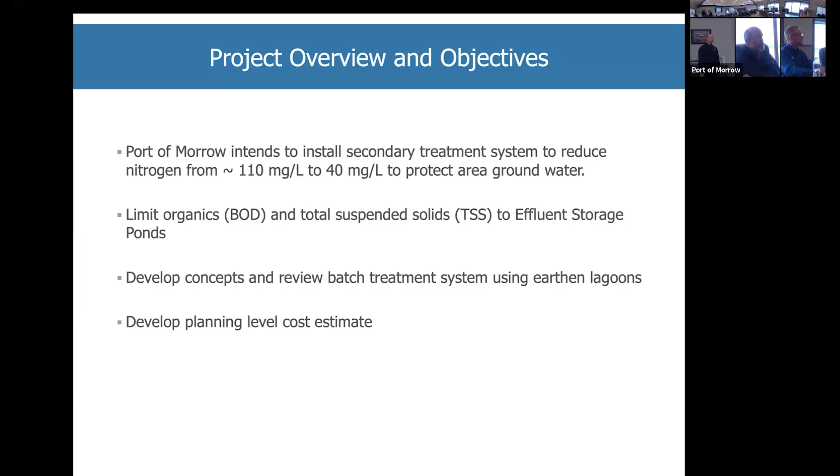In addition, we're utilizing earthen lagoons rather than big concrete structures. We're planning on essentially digging holes in the ground, lining those holes with HDPE liner. That will tremendously save on costs compared to concrete basins, which we'll get into further. And then finally, we're going to close out with a planning-level cost estimate that we have today.

So milligrams per liter, is that synonymous with parts per million? Yes, correct. So what would that equate to roughly, like in pounds of nitrogen per inch of water? That's a good question. Can we make that calculation quickly? Yeah, I can, it is... off the top of my head it's a calculation to get to that answer, but yes, we could. Yeah, you could. I know the answer, I mean.

To convert milligrams per liter to pounds per day, you take the concentration multiplied by the flow in MGD times 8.34, and that'll give you pounds per day of whatever that group was. We have a basis of design where we look at that, because you're right, we have to look at the mass balance as well as the concentrations. We're talking somewhere between 10 and 20. For the 110 milligrams per liter at the port, it's around 22 to 24 pounds of nitrogen. So if you take it down to 40, you'd have about that. I just wanted to give a reference on what we're talking about.

Cody, you want to talk about our basis of design?

Characterizing influent wastewaters is the most important part as we start this project, so we understand the nuances of this specific flow we're treating, with the collection system the port has, from food processors, power plant, and data centers. We look at the flow, how it's coming in, and what we'll be treating on the pollutant side: organics, suspended solids, nitrogen.

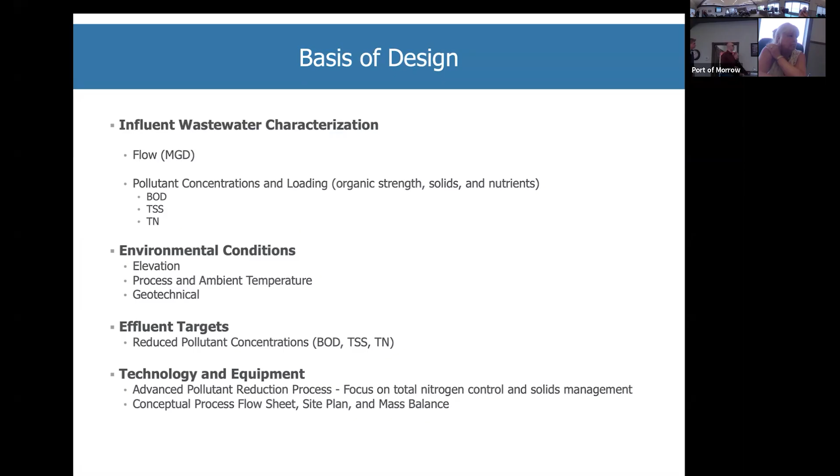So here what we did was, this first column characterizes the current wastewater flows and loads across the flow, organic loading, suspended solids, and nitrogen.

So we worked with Jacob before, and used that information to size the facility based on a future flow of up to 13 million gallons per day. That's about a 35 to 40% increase over what the flows are currently seeing, which allows for expansion and for a train to be brought offline for servicing equipment, while still meeting the current target.

Right now there are really no effluent targets in the current facility, so we have established the new criteria for this new design.

We've also collected the influent temperature, pH, the ambient temperature conditions, site elevation, groundwater, and the soil description for the area, being the Quincy loamy fine sand.

When you say not expected on the groundwater, you mean not expected to meet groundwater in the excavation, at the depth and elevation of the infrastructure? Correct, yeah. We found groundwater around 50 feet deep from the existing grade, and we're well above that with our current design.

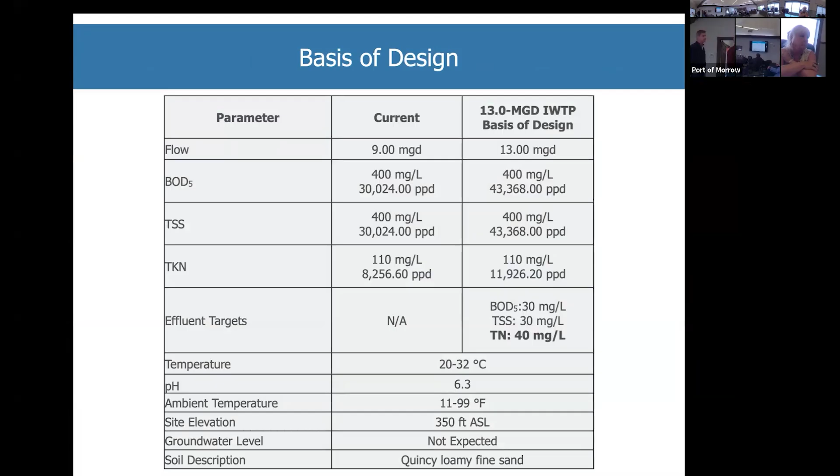Can we go back, I'm sorry, go back, you said it went between two basins? Yeah. Can you point those two basins out? Sure.

So in each of these trains, you have a pre-anoxic tank and a sequencing batch reactor tank. There's a mixing system, by pump motive force, that pulls from the first basin into the second basin. That basin then overflows back into the first basin. So this train, these two tanks, recycles flow back and forth.

So you call them tanks, are they really tanks? These are the earthen lagoons.

I want to jump in there because it's really innovative for an SBR to have a segregated pre-anoxic reactor basin. The reason we do that is we're creating the most efficient denitrification, the second step of nitrogen control, by creating an environment in that first tank with low dissolved oxygen, high nitrate, and lots of carbon, expressed as BOD. With those three ingredients, I get a high rate reaction, and I also don't have to compete for carbon in the subsequent SBR tank.

So there's a nuance here with how we operate in SBR. A traditional SBR, maybe 95% of them I've ever seen, have one reactor, and they just go through batches of alternating fill, air on, air off, settle, decant, take the next batch in. But those are inefficient reactors. They work, but they compete for carbon, and your ratio of high nitrogen to BOD is not ideal for a biological process. So we had to modify that to create a pre-anoxic SBR reactor.

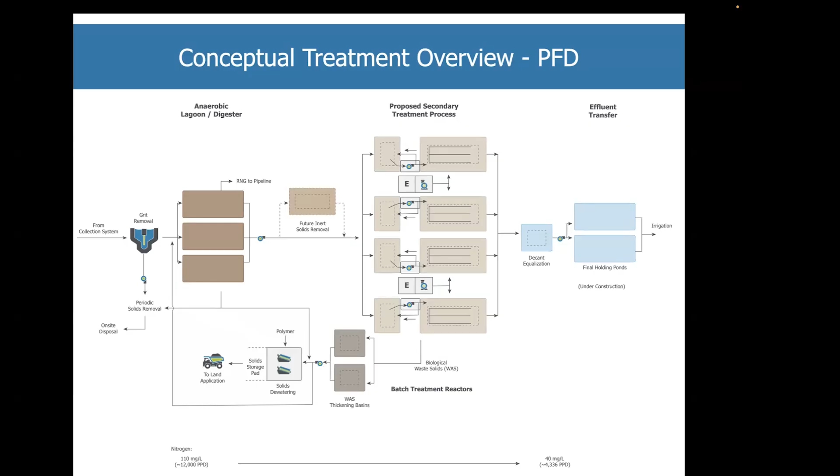Okay, one last question. Are you guys going from the top? Great, okay.

Denitrification needs carbon, nitrate, and a low DO environment. So if you manage your BOD, you'll hit a point where there's no more carbon to drive denitrification, so it will stay in a nitrate form.

You might get some denitrification, some nitrogen bubbles popping out here and there, but we could model that, I don't think you're going to see a lot of it, unless we added a carbon source. And it depends on the retention time.

Which, a question - algae likes phosphorus, likes nitrogen, grows and it dies. That adds another input to the equation. Carbon, yeah, that's carbon. So something to think about. I think that's not the end of the story - if you want to inhibit algae, then you have to remove phosphorus as well.

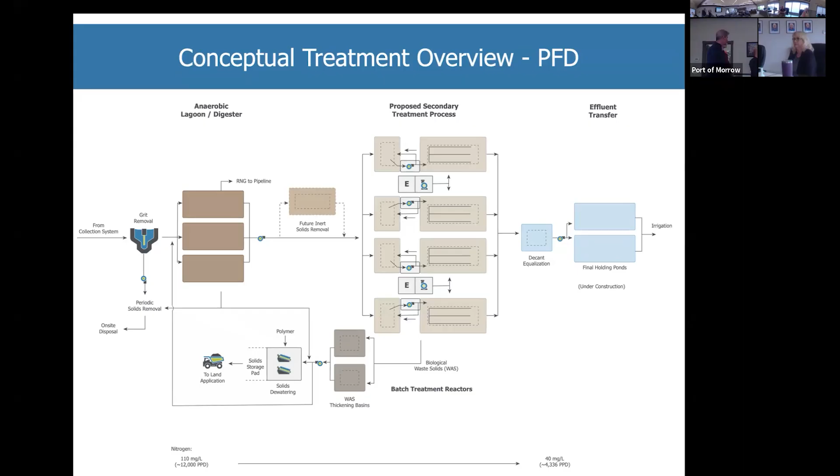Any other questions on the process?

So you guys saw in the chart the overall process flow, kind of converted that into a very conceptual, albeit, site plan - how would this lay out on the existing site? I'll let Cody and Bob give you a tour. I'm glad you guys spent so much time on the process flow diagram, because this makes this one easy.

So this first area of the site plan is your influent wastewater grit removal process. That's going to be above ground, vortex grit chamber with a grit classifier and a big pad to store all the washed grit. So that's step one.

The wastewater will then go into your anaerobic ponds, your digesters, to have that first step of treatment. From there, it will be pumped over to this process here, which we're calling the advanced secondary biological nutrient removal process. So as it's pumped, it will come to what we call a splitter box, which will separate that flow into 4 equal flow streams. It will then be treated in 4 trains.

As we mentioned earlier, each train will consist of an anoxic equalization basin, followed by a sequencing batch reactor basin. You can see the little line inside, that's the bottom of the basin, the line on top is the top of berm. They're about 30 feet deep, 1.5 to 1 slopes, stabilized, lined. We're discussing different construction methodologies and anchoring methodologies for the equipment.

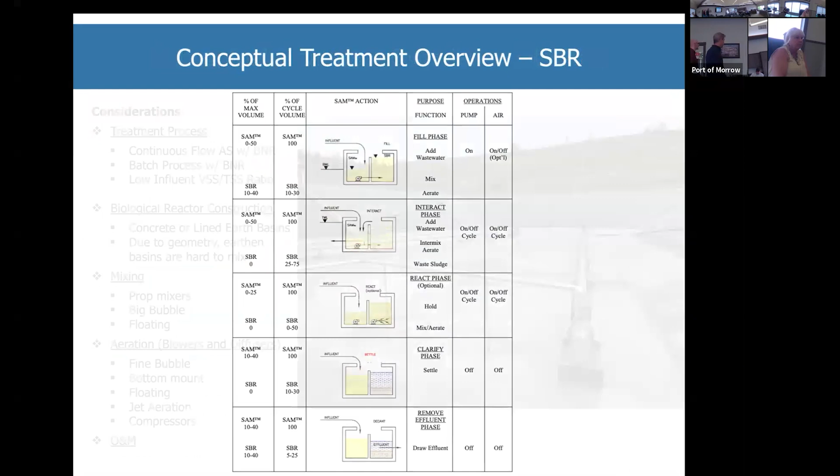So a couple things we want to hit on. We did look at a continuous flow process. We couldn't resist, you know, we had to look at traditional treatment processes in earthen basins to see if that was going to work better. So we did evaluate a continuous flow.

AS stands for activated sludge, which is nothing more than concentrating biomass and retaining it, so we can do more work in a smaller reactor size. BNR stands for biological nutrient removal. We got a couple proposals for that technology and equipment, and they were more money. We're waiting on a couple more, but that is a proven process to remove nitrogen.

That's what the majority of municipal wastewater plants are designed around, a continuous flow activated sludge process. They need clarifiers, and clarifiers have mechanical mechanisms. They have pumps that return those solids to the front to maintain the biomass, so they tend to be a little more money.

An SBR, or a batch process, does all the work in one basin. It treats it in batches, so your reactor and your clarifier are combined. So we looked at those, and that's ultimately what we think is the best choice.

The other thing which triggered this whole conversation about upfront grit removal and settling is that your influent had a very low volatile component. If you look at our total suspended solids, there was a lot of inert material. That's what led us to say, let's try to get that out up front. Let's not carry that through the process, consume volume in your anaerobic reactors, or have to move it, pump it - it's dead weight. That was the indicator, based on the good data that Jake and his team provided, that popped out at us.

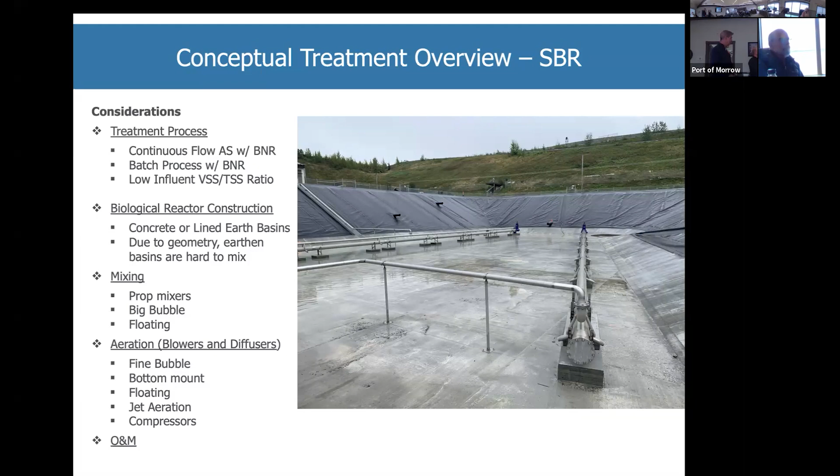You do need supports for these headers. Let's go to the next slide, it might be a better picture. There you go. So there's a picture of a nozzle.

This part is the air, this is the fluid. At the very end, they have a submersible pump at the end of the header. We don't have that in our design, we have a submersible pump, but it's accessible off a guide rail system and a crane, so you just pull it up. This one, in my opinion, having it hanging out in the middle of the pond was not a good idea.

So are you decanting through these and then filling on top? No, we have a separate decanter, what we call a solids excluding decanter. So it's a weir with a little internal mechanism that keeps the solids from migrating out, and it's got an airlock and a release valve.

So it's a fixed weir, and then you open a valve, break the airlock, and it withdraws the prescribed amount to what we call bottom water level. Top water level is full, bottom water level is the bottom of the batch. When it hits that, it closes the valve, the control panel says okay, I'm back in business, we start filling it. And so it goes through that iterative, repetitive cycle.

So this is a jet header. We like them because they have a high transfer efficiency because there's a lot of turbulence. In wastewater, sometimes there's an ideal oxygen transfer, and then there's a not so ideal one. Depending on the biological process, the amount of surfactants, the age of the biology, there's what they call an alpha factor. Jets have a high alpha, meaning they're more efficient than fine bubble, and they kind of equalize out in terms of overall efficiency per depth.

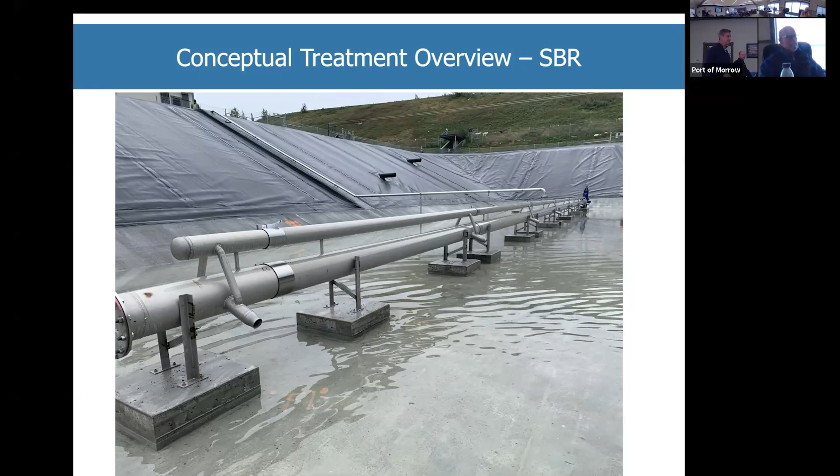Next slide. Here's just another view, you can see the airline, two headers. This wasn't a rectangular base bottom in this lagoon. We would propose three headers and bi-directional headers. So this is just an example to give you a perspective on a 2.4 million gallon lagoon.

One thing to note on this design, kind of similar to your concerns related to freeze-thaw cycles, is these airlines will be vibrating, and we're concerned about that interface with the liner system. So if you look closely, the airlines are actually installed on concrete ramps that go up to the top, and then the line terminates in the concrete ramp. That's another thing we'd suggest as a value added item. It's a little bit of upfront cost, but it's going to buy life for the liner system.

What kind of security around all of this have you considered? As of right now, we would plan on the whole site being circumscribed in a 6 foot tall plus chain link fence with some barbed wire, similar to the port's existing facilities. We could certainly explore other avenues for security, but as of right now, that's what we're planning on.

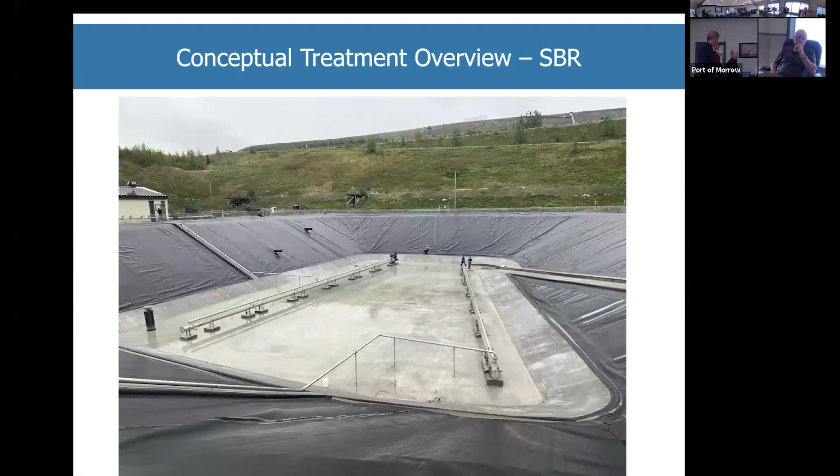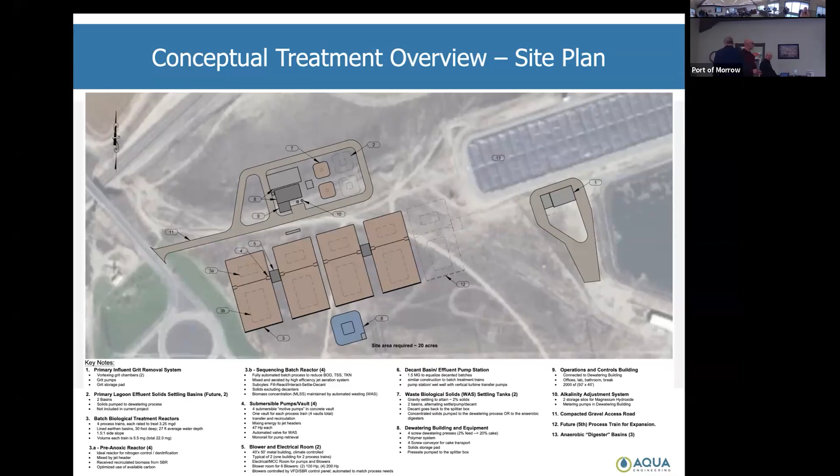So if we look at the solids handling, we mainly have two sources of solids: the inert solids that come in with the process, and the biologically produced bug bodies, another way to look at it is the waste activated sludge. Just to quantify what inert solids loading could be coming in, at design conditions of 13 MGD, you're looking at close to 110 dry tons a day, 128 cubic yards of material a day that would be just building up in those anaerobic lagoons.

So that takes up a lot of volume. That's then arguably more expensive per pound when you have to roll that cover back off and remove all that material out of there. We have a grit system, it's removed, you don't need to add polymer to remove it. It's a cheap pound of solid removed from the system, and it protects downstream equipment from erosion and wear and tear, and it's not going to build up in other basins. So if you fill up your anaerobic lagoons, you have more carryover into your secondary process. Since you start filling up the secondary process, you're going to have more downtime and maintenance there.

The inert solids dewater and compact, they have higher density than the biological solids. Biological solids are like a fluffy brownie - a material that's only about 20% dry, and it takes up a lot of volume. While you're dewatering to about 20%, they're still pretty light, they have a lot of water still in them, so from a cubic yard volume, even though the dry tons are a fraction of the incoming grit, it's still actually more volume they have to manage and deal with, either internally to the process or hauling outside.

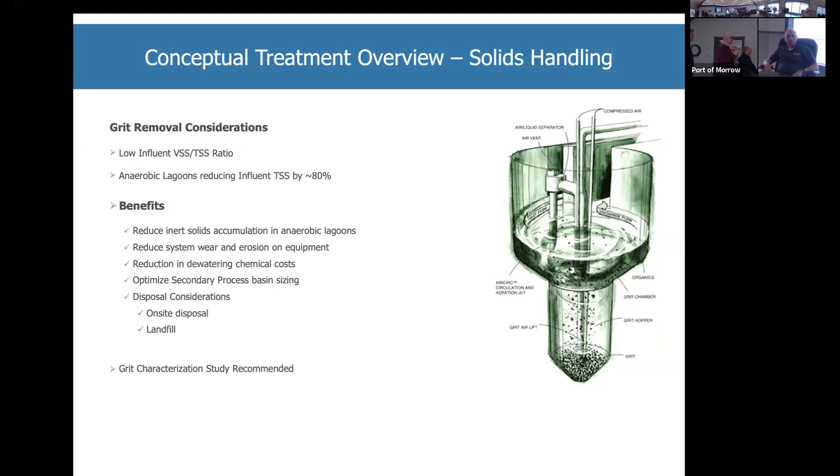The way we would approach this in the detailed design phase is we would characterize the grit, doing a particle size distribution or mesh study to see the gradation of that material. Then we would share that with the vendors and design and select the best system to achieve the highest removal efficiency for your specific wastewater.

On the biologically produced solid, or waste activated sludge, the reactors or basins will have about a 0.3% solids concentration. The thickening cells will thicken that up to about 2%, and dewatering with a flocculant aid, that polymer, will get you up to about 20%. So if you look at it from 0.3% all the way up to 20%, that's a significant reduction in volume and just how you typically manage waste activated sludge.

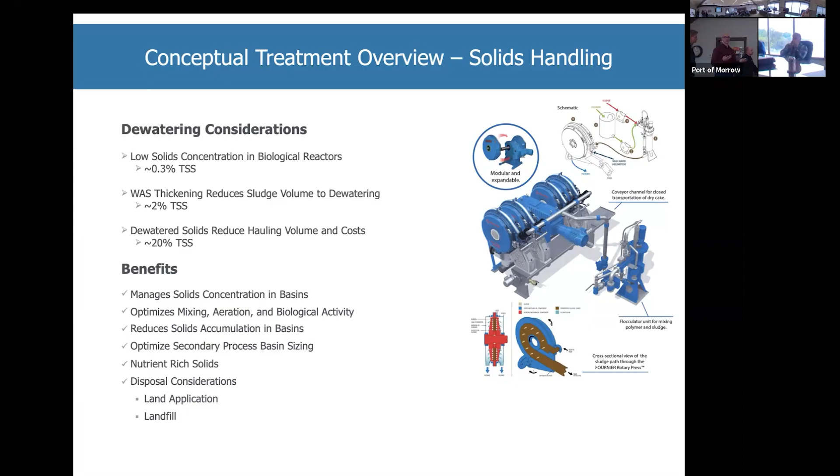I'm sorry, did you give volumes on the solids discharge? Yes, on the first. Yeah, correct.

How did he get up there?

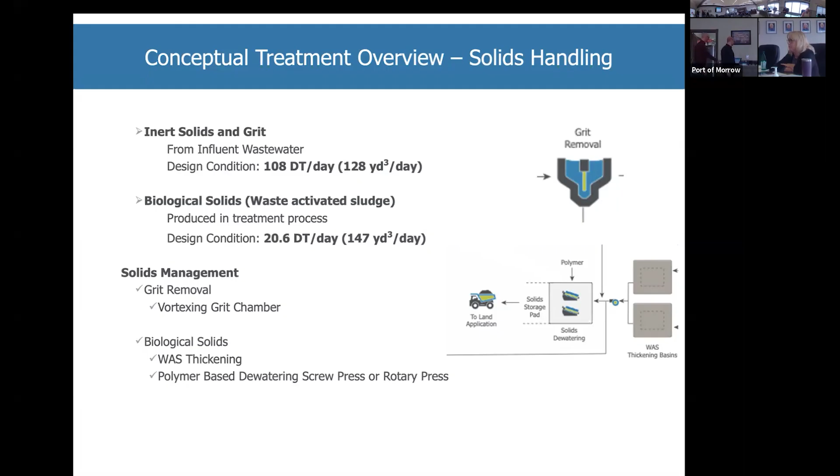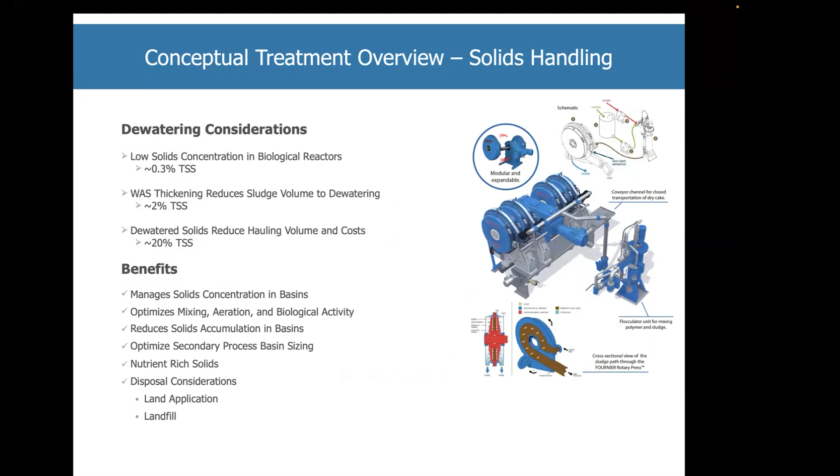That slide is a great example, a great illustration of the expense of hauling water around. I appreciate that you showed the dry tons versus as-applied tons, because it's, what was it, 20% of the dry tons but more volume. Correct, yeah, lower density and higher water content.

So we've come up with a very preliminary cost estimate to match this conceptual system that we've been talking about. We've broken that cost estimate into several different categories, which we'll share in the following slide, but I want to review what's included in these various categories.

Site work includes excavation, mass earthwork, concrete, if we're going to go with those concrete floors we saw earlier, and piping for the basins you saw in those photos. That includes slope stabilization efforts for the edges of the ponds, again with the assumption that we're not going to encounter any groundwater.

And we've got a potable water supply from Gar Swanson Drive, which actually is already on site, based on what Jake told me earlier today.

The equipment section includes blowers, pumps, decanters, the grit removal system, aeration and mixing, our dewatering system, plus redundancy added to all of those items, and any shelf spares that we might recommend you have on site.

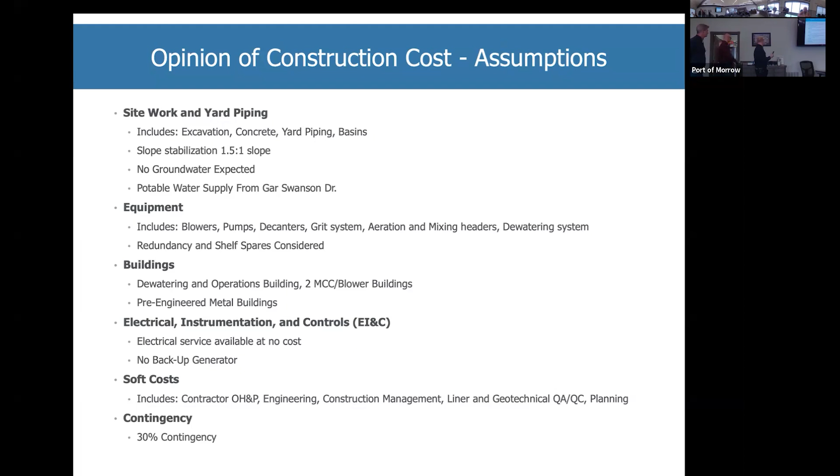So with that all said, we'll share the big numbers for you. We're at a total cost of about $71.5 million right now. But bear in mind that 30% contingency, that's $13.5 million today.

All of these costs are based on project experience that we have. We have projects between Southern California and upstate New York. We aggregate all of that experience and put it into a big spreadsheet. I realize some of the costs we included might be from Southern California, which tends to be a bit higher. Some of it might be from Iowa, which might be lower. So this is a very conceptual level cost estimate, and it will get further and further refined.

I'm going to be working closely with Jake and his team. He's got a very good understanding of the labor markets around here. I think equipment costs are what they are - it doesn't matter where you are in the country, but the big variability you do see tends to be with labor and what we call general conditions. That's kind of where the contractor makes their money.

So we've got site work of roughly $10 million, or 9.3 million, equipment costs of 14.8. Buildings are at 6 million. Electrical is 14.5. Again, our contingency is just about 13.5. The soft costs are 11. That gives us a total of just under $70 million.

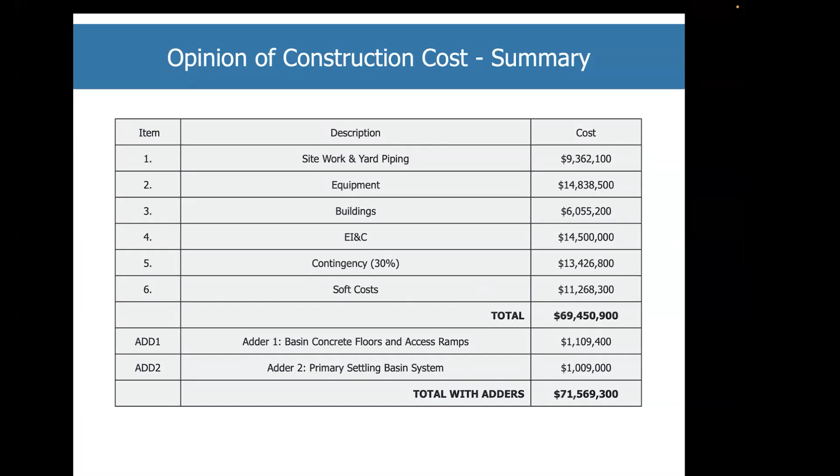It was important to me to have some adaptability - the point you were addressing was important, because if further regulation comes down the road where we have to adapt and take more out, we can. The value of the nitrogen in the water to the farmers is important to me as well - symbiosis, instead of just going in and adding it later. The decreased capital costs and strain on our industry is important to me as well. So I'm encouraged to hear this presentation today versus the one we heard before.

Honestly, I want to treat it down to 7, and if we needed to dial it up, we could, or if people wanted us to, we could. Not to say that we can do that instantly with one dial here, but we could, should the issue arise in the future. It sounds like to me - if I'm off base, please tell me.